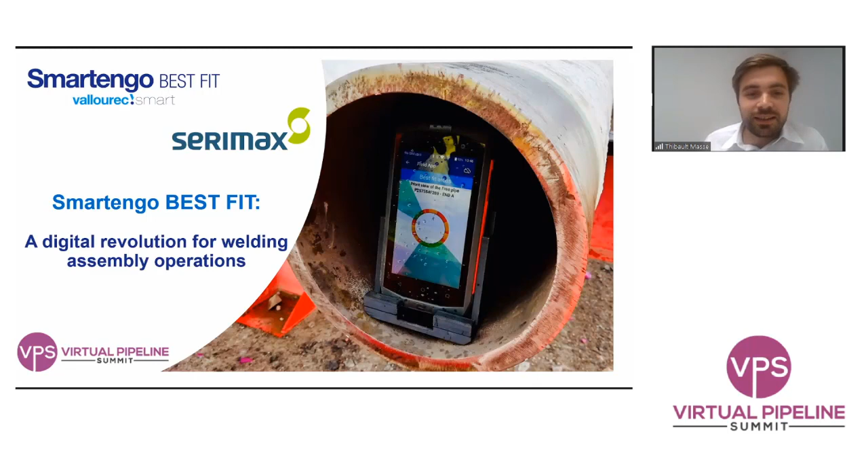And BestFit, one of the solutions of the Vallourec smart service offering, is definitely aligned with today's program by the innovative data approach it's using and the fact that the solution is relying on a smartphone app to be used in the field. But before talking about the solution, I would like to talk a little bit about the challenge we are answering with BestFit. And for that, I will give the virtual floor to Sébastien.

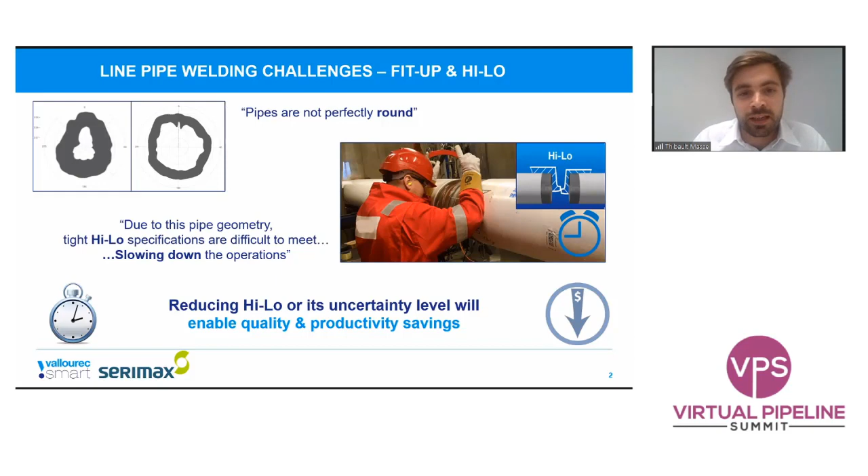Thank you, Sébastien. So, as said, reducing Hi-Lo or the uncertainty level will clearly be beneficial to the quality of the line and also to the productivity of the operations. And as images speak much better than words, before introducing the details of the solution, I'd like to show a short video.

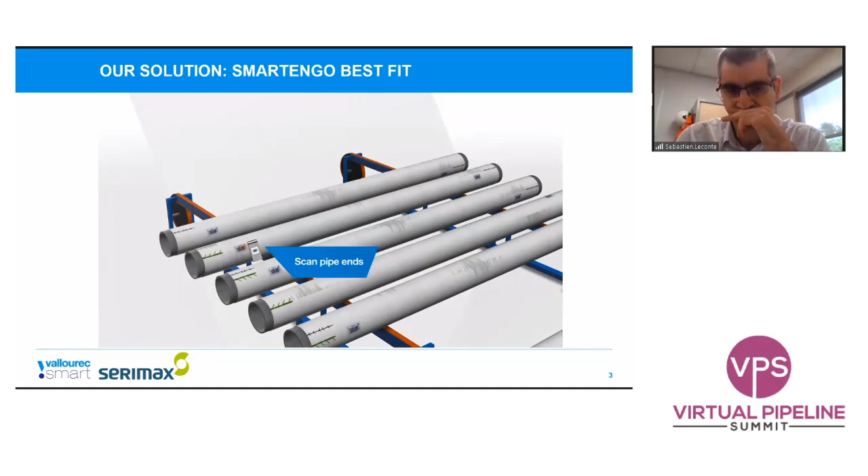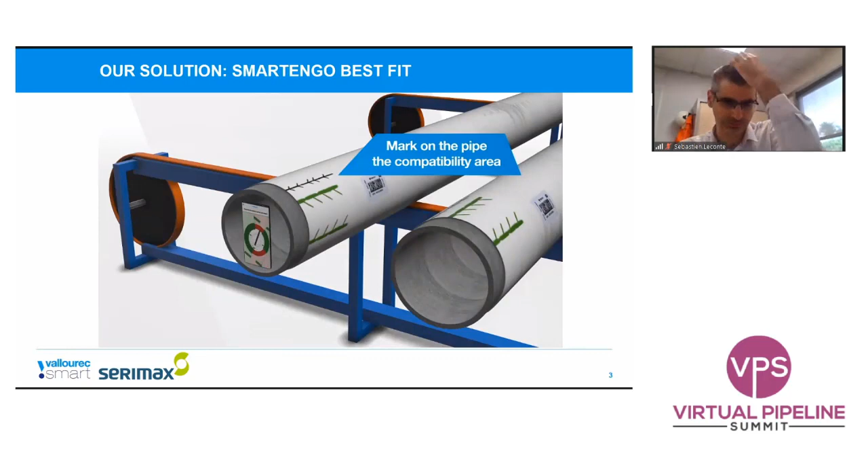So as explained in the video, BestFit will bring productivity and quality improvement using data analytics and a smartphone app that is to be used during welding operations. The solution is actually threefold, as you see here. First, we have unique pipe end measurement capabilities. With the portable tool that we're using, we are able to measure pipes anywhere in the world at any time, meaning we can avoid being in the project critical path, or so to say, we can measure the pipes in hidden time. And as well, we can measure any pipes, meaning the solution we are offering here is not related to Vallourec pipe supply. So this is the first brick.

This measurement data will feed what we call the pipe end compatibility analysis, which is basically a unique algorithm that will simulate the compatibility of the pipes in the batch in order to enable either Hi-Lo reduction or productivity improvement without requiring at all the need for sequencing the pipes when welding. And last, a mobile app that is to be used in the field in full autonomy by existing teams. So we are not sending any additional people on site or on board the vessel, but it's to be used by the existing team after proper training.

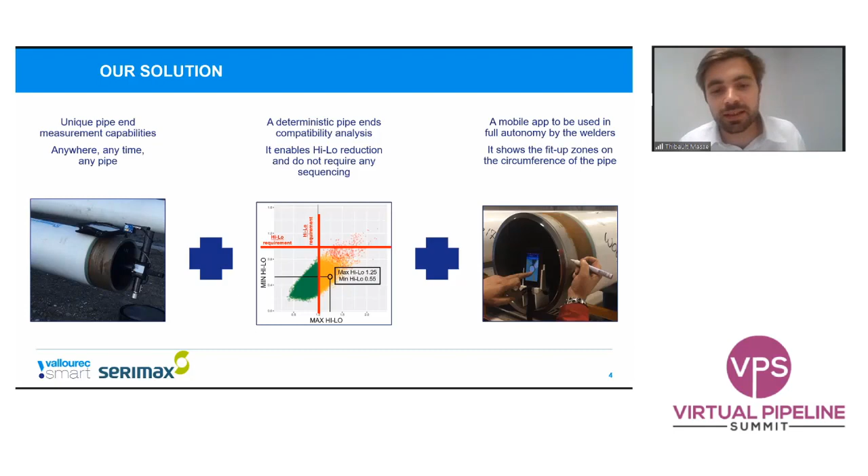So the solution is fully modular, and bricks can be used alone, either to get visibility on upcoming operations or to improve efficiency of the operation. There are different targets that can fit the different project objectives. And we'll go through them one by one, starting with pipe end measurement capabilities using the portable tool. So here I hand the floor again to Sébastien.

So the first step to make the best fit analysis and define the best match between two pipe ends is to make the pipe end measurement. So the first step, we have a unique pipe end identification, and then, as you can see on the video, we have developed an equipment called CleverScan, which enables us to make the pipe end measurements either at the pipe mill or, as you see on the video, on site, just before the welding.

And this equipment covers a large range of pipe dimensions, from 5-inch ID to 56-inch ID, and also covers wall thickness, an important wall thickness, with an accuracy of measurement of 0.05 millimeters.

So the step is: with this mechanical and laser measurement system, we make the measurement. After this, all the data and the measurements, the 360-point measurement made all around the circumference of the pipe, are stored in a tablet. And we have software which enables us to make a report, to confirm that the pipe ends are in tolerance. And after, those data can also be used through the best fit application and software in order to make the best fit analysis and define the best fit-up between two pipe ends.

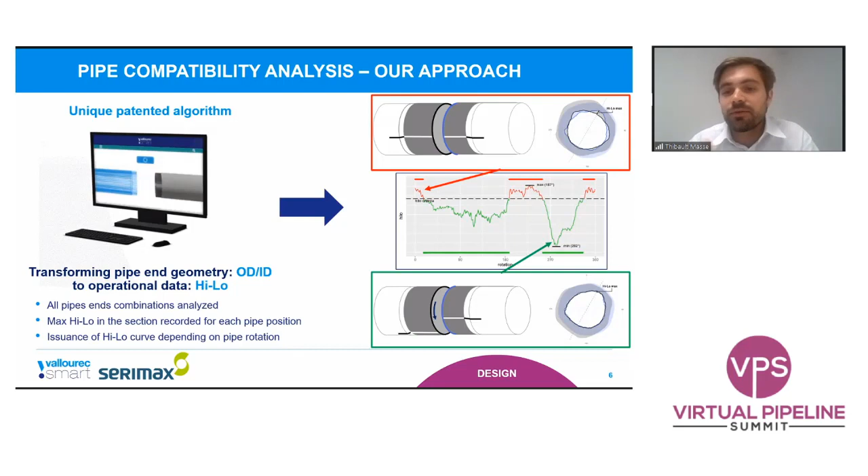So this curve will be built for each and every possible pipe end combination of the batch. And we'll keep the min and the max value of this curve to put them in a chart, which is the one you see here. We have in the abscissa the maximum Hi-Lo of the curve, and on the ordinates the minimum Hi-Lo of the curve. And the red lines that you see are basically project requirements. So one dot in this chart is not a pipe, one dot is a pipe end combination. And we end up with 3 different colors.

First, green ones. Green ones have a maximum Hi-Lo and a minimum Hi-Lo which are within the specification. In that case, the pipe end combination will be fully compatible. Whatever the pipe position, the Hi-Lo will be respected. Now we have as well the yellow ones. For the yellow ones, the maximum Hi-Lo is above the threshold and the minimum Hi-Lo is below. So this is the example I've just shown before, where we had some area that was above requirement. In that case, we need to rotate the pipes in order to match the specification.

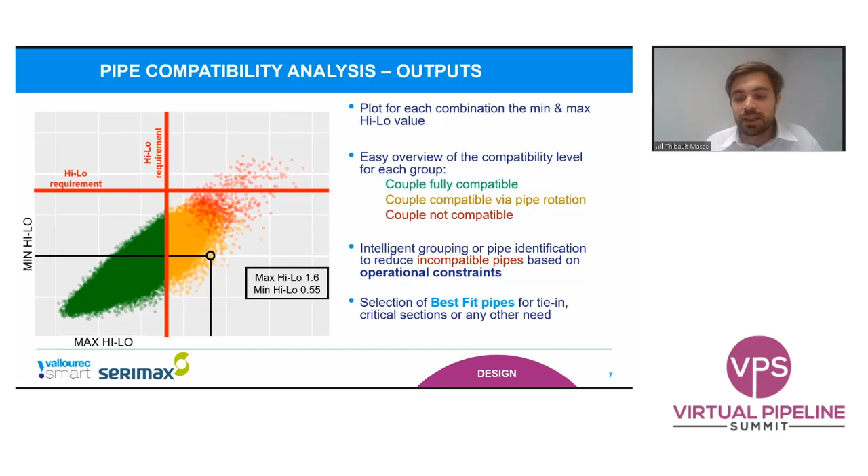And last, which can happen as well, we have incompatibilities, which are the red dots. Incompatibilities are either because the Hi-Lo cannot be matched whatever the pipe position, or because the area where the Hi-Lo will be respected is too short to be operationally viable. So those are our red dots. Based on that, we can definitely go down to pipe level in order to select either the best fit pipes, or pipes that would create the most incompatibilities. But basically, this chart will give full visibility on upcoming operations and allow us to anticipate accordingly. Let me give you two examples. The first one is the one you see here.

We have a lot of green dots, so basically a good compatibility, but as well a certain level of incompatibilities in red on the top right. Going down to pipe level, we identified that two pipes are creating all those red dots. You can imagine if you have a pipe with cropped ends, obviously when testing against all the others, the compatibility will not be good, and we will end up with those red dots.

So if we remove those two pipes, and when I say remove, I say either use that spare, either use for welding qualification or welder qualification, I mean for another use, or even a non-critical section that could accept a higher Hi-Lo. If we remove those two pipes, we are able to ensure smooth production. No incompatibilities appearing on the line, and we have secured the production flow. So this, I would say, would be, for example, contractor point of view, maximizing efficiency.

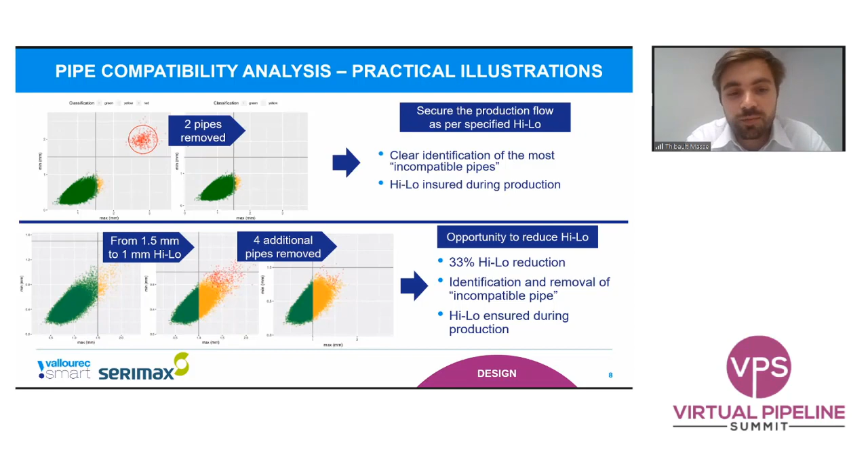We also have another approach, which can be Hi-Lo reduction and beneficial to quality of the line. So let me give you this other example, which is the one at the bottom. We start evaluating compatibility of the batch with 1.5 millimeter Hi-Lo. We see as well that here we have a lot of green dots, and so identify the opportunity to reduce the Hi-Lo threshold to 1 millimeter. If we do so, we obviously have less green dots, a bit more yellow ones, and incompatibilities appearing in red.

Again, going down to pipe level, we identified that 4 additional pipes need to be rerouted or adjusted in order to remove incompatibilities. But doing so, we have reduced the Hi-Lo by 33% and still see operations will run smoothly with roughly 50% of the pipes being fully compatible, the pipe end combination, and 50% requiring a rotation.

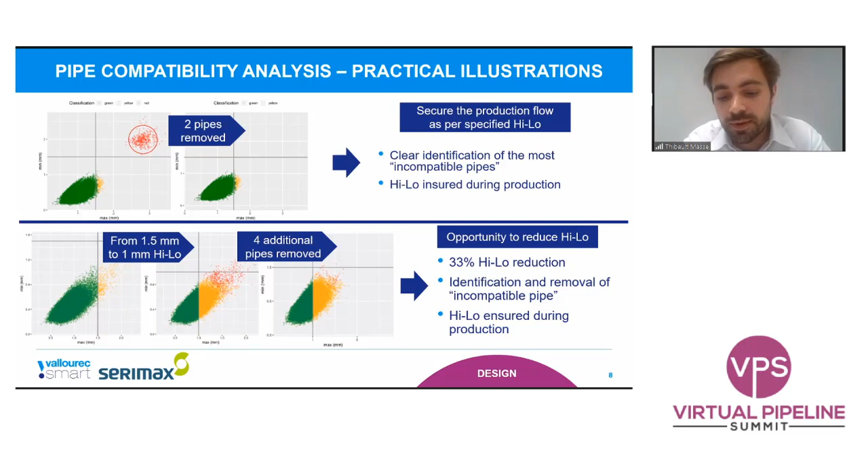So what you would tell me now is that bringing additional rotation by reducing the Hi-Lo level would be detrimental to production efficiency, because there would be more and more trial and error in the field. Actually, no, because this is where the app, the Best Fit Finder app, will come into play. So if we go to the field, first of all, no sequencing will be required. And the app that we will provide is to be used offline by existing contractor personnel or welding personnel in full autonomy, just after proper training.

The way the app will work is that the first pipe, which is usually the one already welded on one side to the main line, should be scanned. And then the incoming pipe, so the pipe to be welded, should be scanned as well. And then the app will basically provide live the Hi-Lo curve that you see here on the screen, but also, and more importantly, the best fit result. And best fit result can be of 3 types, and I'm pretty sure here you will recognize the colors that we had in the previous chart.

The green means full compatibility. The red means temporary quarantine, if we run into an incompatibility, in which case the pipe should be put aside and the app will automatically call it back as soon as the compatible pipe is scanned. But last, rotation required are the yellow dots from before. If this happens, the compatibility area can be easily identified.

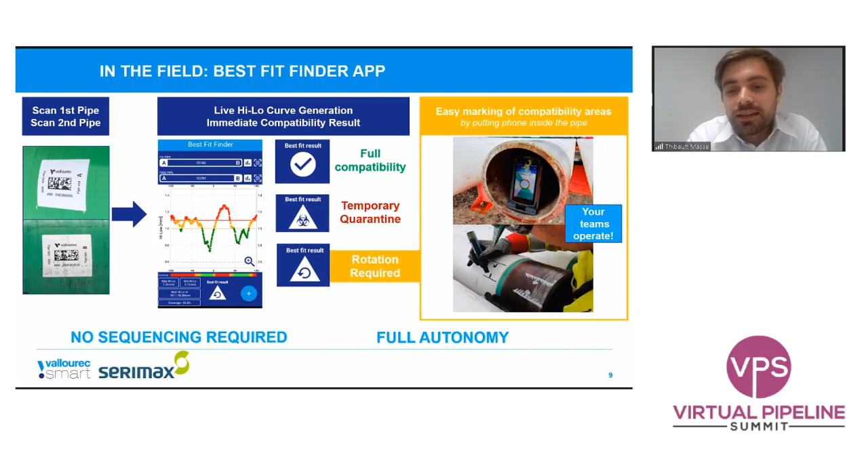Just by putting the phone inside the pipe, which we see on the right side of the screen, and aligning the reference line, the compatibility area, the green ones, can directly be marked on the pipe, so that when the pipes reach the fit-up station, operators only need to match the compatibility areas marked on the pipe with the 0 degree reference line of the other pipe. We have here an example in the picture with the evolution of the Hi-Lo.

So we have here an instant fit-up. There is no more variability, no more trial and error. And we definitely have an increased efficiency in the operation by the immediate positioning of the two pipes.

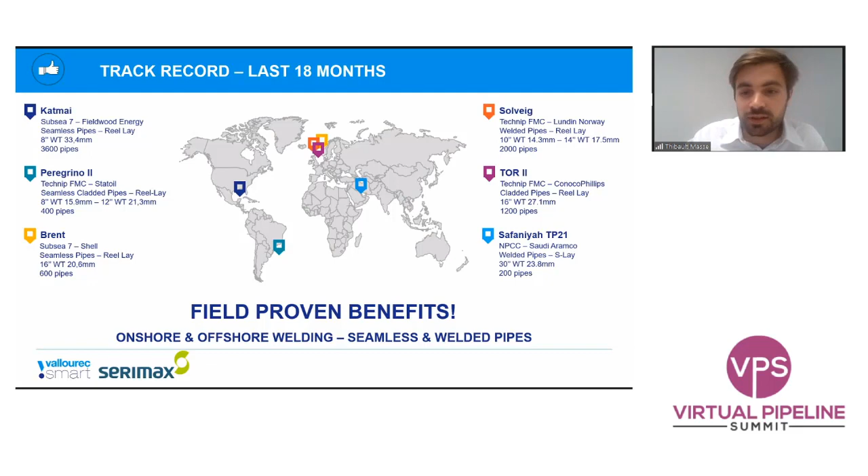So the solution is recent. We developed it 18 months ago, but it was already used in 7 projects. Actually, there are 6 being displayed here on the screen. It was used in various regions of the world. In half of the cases, it was not on Vallourec pipes. You see here welded pipes and cladded pipes, whereas Vallourec is a seamless pipe manufacturer. And the benefits of the solution are field proven, and this is what we will show in the next use cases. So Sébastien, I'll let you present the first one.

Yes. So as Thibaut mentioned, this solution already has a track record and has been used on several projects. One of these projects was on a spool base, and the BestFit application was used on both a seamless and a cladded pipe on this project. And by using this application, it enabled us to reduce the fit time. As Thibaut mentioned at the beginning of the presentation, one of the main advantages of this solution is to be right first time in terms of fit up.

So it's a good improvement in terms of productivity, and it also enabled us to ensure during all the production a maximum HiLo of 1.0 millimeter, which enabled us to ensure good quality in terms of welding all along the production. So clearly a good success for this application on this project.

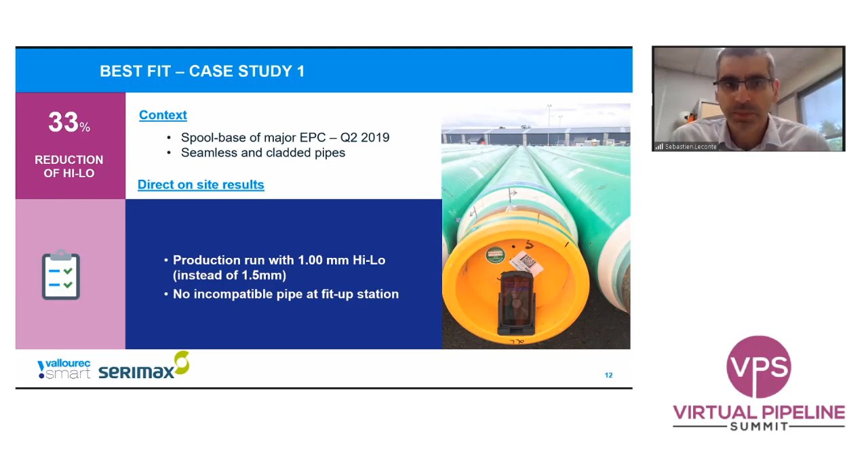Okay, switching now to the second use case. We are again on a spool base, end of 2019. This time we're dealing with welded pipes. And here, thanks to the compatibility analysis, the production was run with 1.3 millimeter HiLo instead of 1.5. So we can directly derive quality benefits.

But more importantly, here we had strong production time savings thanks to the fit-up app being used, because the fit up and the root pass operation was performed 50 seconds faster than usual, which basically allowed us to debottleneck the fit up station. So here as well, we can derive direct benefits in terms of efficiency and, I would say, direct money savings from a faster operation.

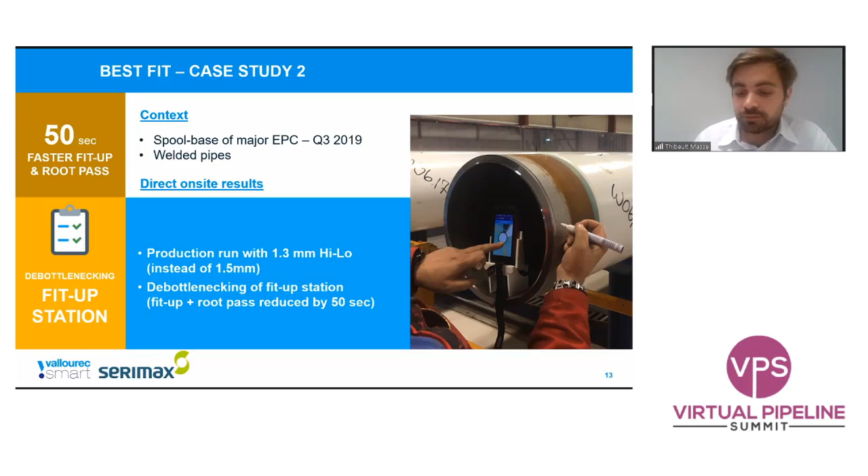So to conclude this presentation, BestFit is a fully modular solution, which, as I said, can be used standalone. And actually, the different bricks can also be used standalone, not linked to Vallourec pipe supply. The compatibility analysis will provide visibility on the upcoming operation. And based on it, it can be decided whether or not the app needs to be used in the field. And should the app be used, it will be done in full autonomy without any need for sequencing.

And all in all, I would say BestFit combined will maximize the time and money savings. And we estimate savings of up to 10% production time, which we would translate into $75,000 per kilometer laid in the case of offshore laying.

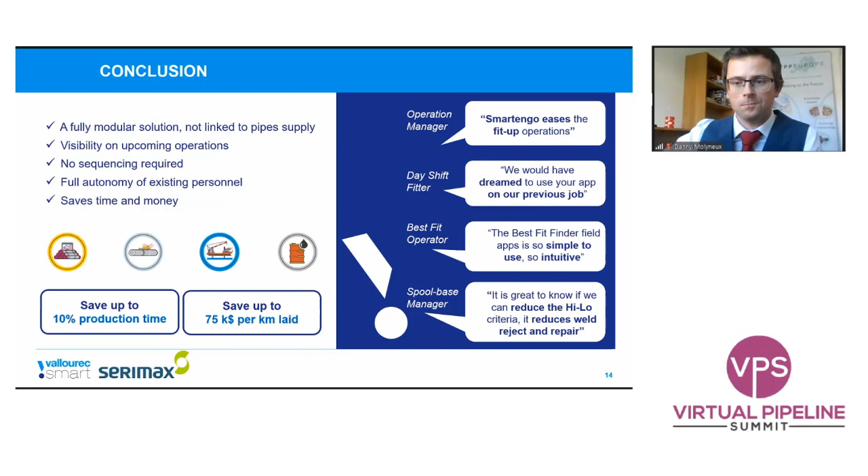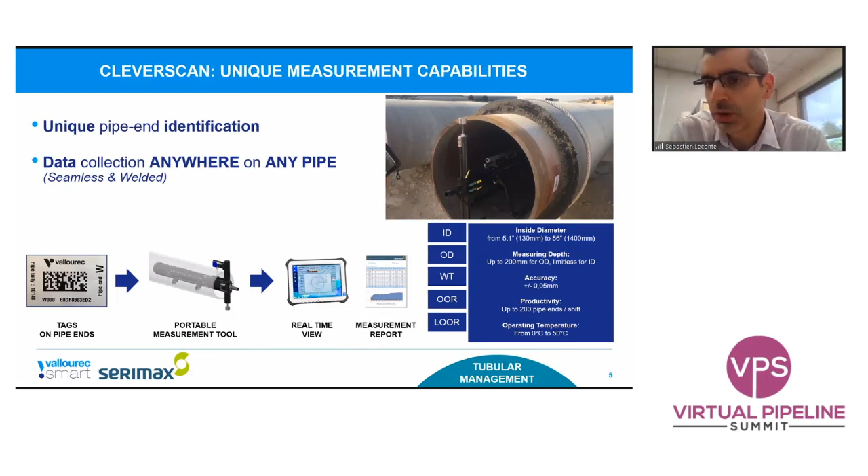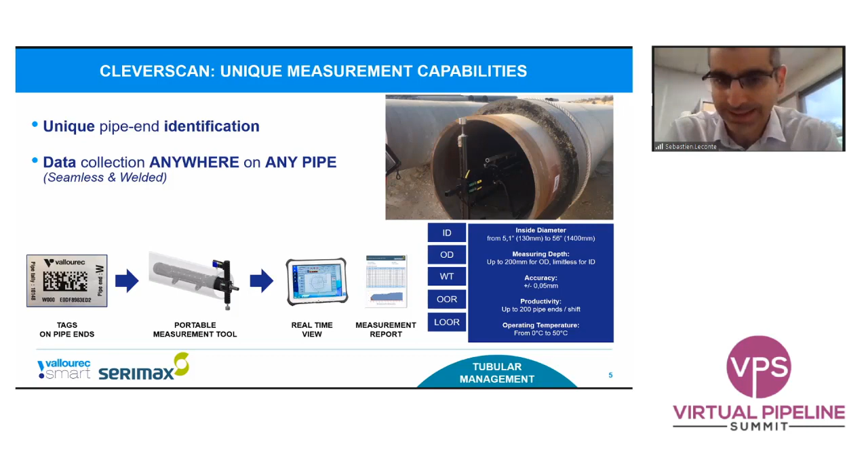So this solution, in terms of pipe end measurement, in fact you have two laser sensors. One is put inside the pipe and the other one is put outside the pipe, meaning that with the Cleverscan equipment, we measure at the end ID, OD, and wall thickness, and we can also define the out of roundness. So that means that during the measurement, we take into account the wall thickness of the pipe, and it's also taken into account during the data analysis that is provided after the measurement.

Yeah, maybe to complement that point, if thickness is a concern, we can perform the analysis considering inside diameter HiLo, but also outside diameter HiLo. And we are able to combine both, so that would definitely include the wall thickness being considered in the analysis itself.

Thank you. We also have a question from Jerome, who says, can you train people to do this remotely? And how long should it take? So the training is very simple, thanks to the nice, I would say, user experience that was developed in the app. When we train people physically, it usually takes less than an hour. And due to the current context, we have indeed already started to train people remotely, and it works, I would say, pretty well. So yes, definitely.